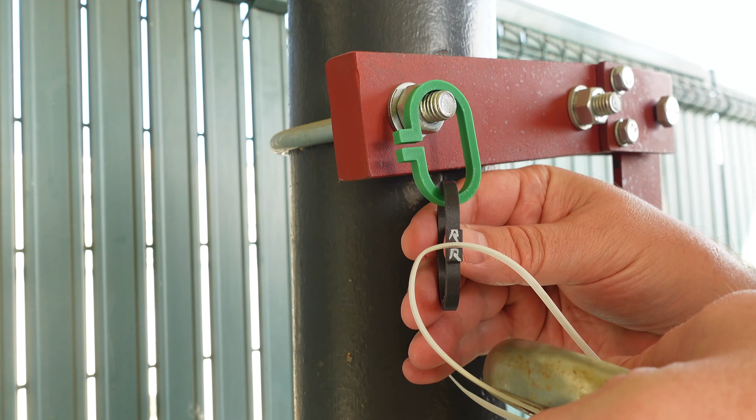This is one of the best non-reinforced ABS materials, and this is the carbon fiber version from this video, the weaker one. Even if I already did a creep test with this test object, it still has less deformation here.

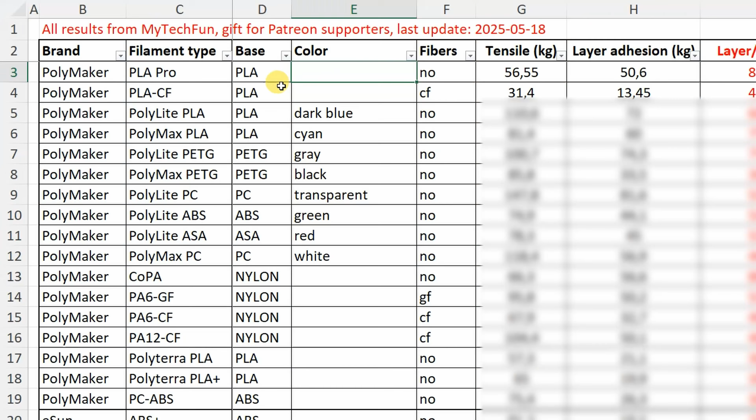I checked the summary table from Patreon supporters and I noticed that I never tested ABS filament reinforced with carbon fibers. With glass fiber, yes, but with carbon fibers, no so far. And immediately I have here two types: one is the regular carbon fiber and the other is the core version, where we have those fibers inside the filament. These two spools were sent to me by Siraya Tech for the testing and review video, but there is no additional payment, so this is not a sponsored video by Siraya Tech. This channel has its own sponsor, and that's Polymaker.

Now let's see some specifications about ABS-CF. It contains 10% chopped carbon fibers, it is heat and chemical resistant material, and it has dimensional accuracy and great rigidity. And now about the core version.

It contains 20% core concentrated carbon fibers, and with this we have all those advantages of the core filaments, like stronger layer adhesion, reduced nozzle wear, it's safer because fiber exposure is reduced, and we have a smoother surface. It is heat resistant and can be used up to 90 degrees Celsius applications.

Now the print settings. The print temperature in both cases is very similar. For the carbon fiber version, the nozzle temperature is between 250 and 270 degrees Celsius. On the core version, the maximum is 280 degrees Celsius. The bed temperature is the same, between 100 and 110 degrees Celsius. Of course, we have to use a hardened steel nozzle. The fan between 0 and 20%.

They also mention it is recommended to use an enclosure with a maximal temperature of approximately 50 degrees Celsius, which can be even passively heated by the heated bed. But in this video I decided to test this finally to see if an actively heated chamber will significantly improve the layer adhesion.

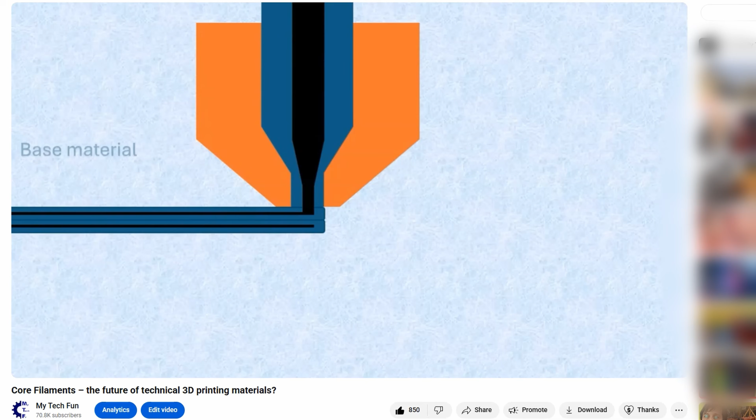If you want to know more about core filaments, I have a very short video, only 3 minutes, where I explain why the flow is laminar and why we have all these advantages. Actually, there's one exception: if you use some kind of CHT-like nozzle, in that case we don't have that advantage of reduced nozzle wear, because the part is inside the core of that filament. But even in that case, it is recommended to use hardened steel or some kind of wear-resistant nozzle.

Let's see what's in the box. Good vacuum packaging, and this material is great against moisture. I can see the bags are resealable. On the sticker, slightly different information compared to the website.

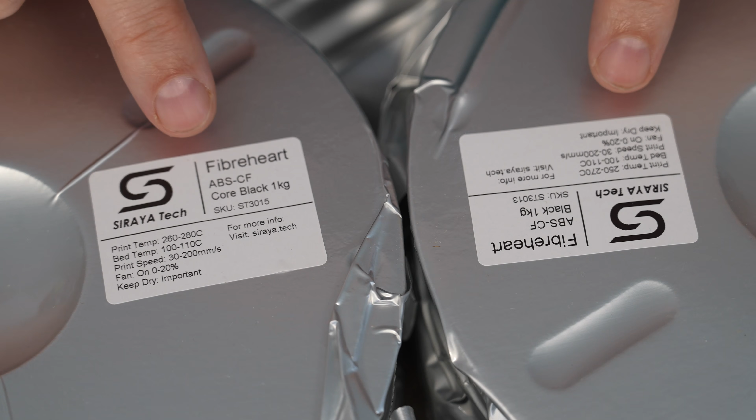Basically on the core version, a slightly bigger print temperature range, between 260 and 280 degrees Celsius. On the regular carbon fiber, between 250 and 270 degrees Celsius. In both cases, the max speed is 200 mm per second and the fan between 0 and 20%. Let's open the bags above the sealing line.

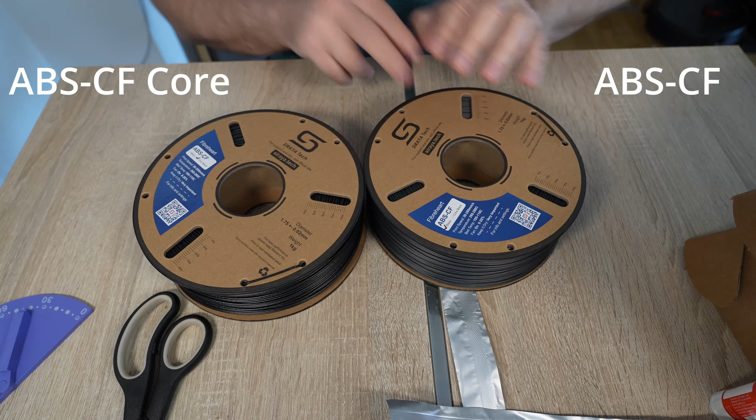So we have the core and the regular version, and on the sticker I can see the difference here. It's quite obvious that this one is shinier compared to the other, and to the touch it is smoother.

Let's see how brittle the filament itself is. This is the regular carbon fiber version. And this is the core version.

Let's measure it. Before measuring, I want to mention this: because of the smaller density, they have to place more filament on the spool to reach that 1 kilogram. But in this case, I would prefer a bigger spool, or let's say having 0.9 kilograms on the spool. This may fall down during printing.

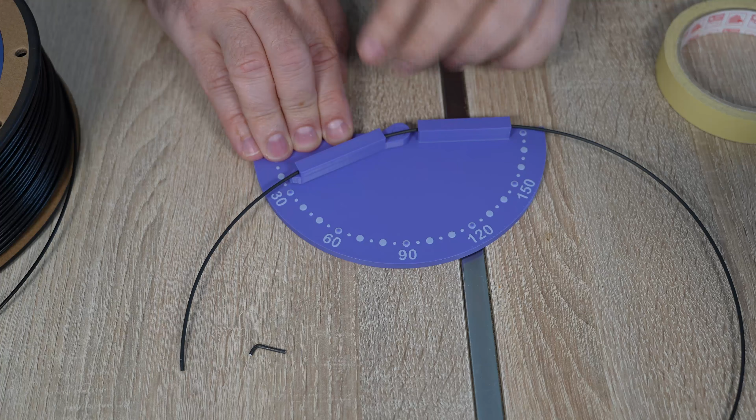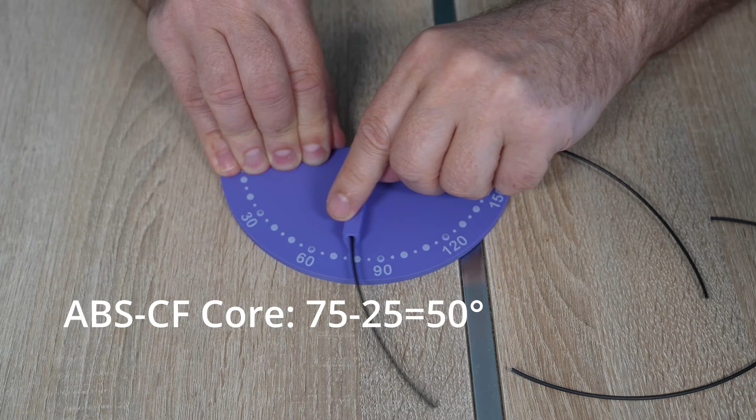Like this. This is the regular carbon fiber version, start deformation 25 degrees. I will check the footage, but I think it was 85 degrees. This is the core version, start angle 25 degrees, approximately 75. On the website they mention it is dried before packaging and we can use it out of the box. Of course, depending if you store it for a longer period, then I would suggest drying this filament.

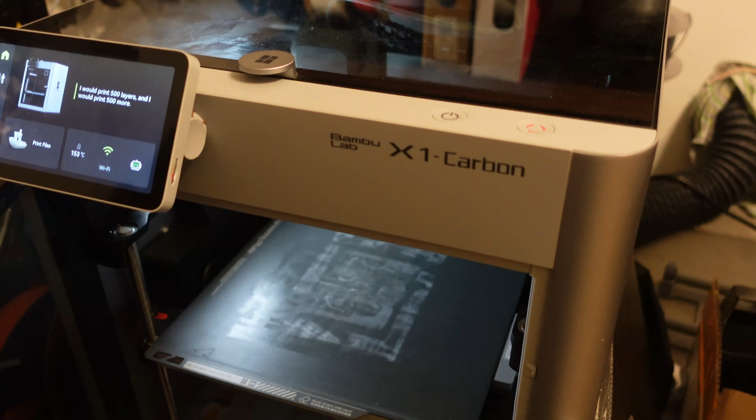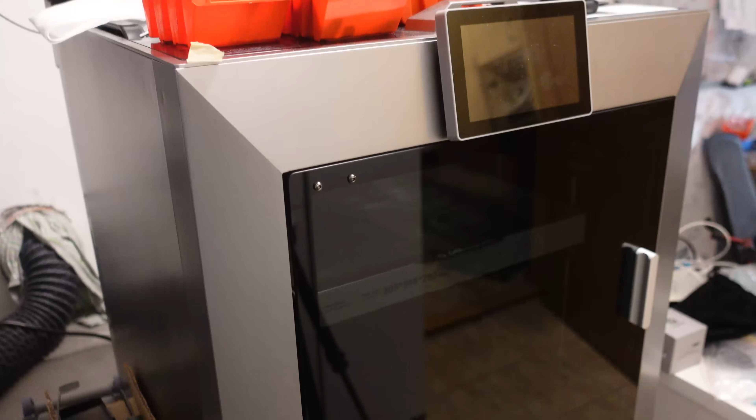Almost all test objects will be printed on the Bambu Lab X1 Carbon. I will use an engineering plate with some glue on it. My X1 Carbon is connected to that exhaust hole on the wall. Later, when I test the actively heated chamber, I will print on the Qidi Plus4. The printing I will start with ABS-CF, the regular version.

Settings in the slicer: I'm starting from the generic ABS profile. The nozzle temperature is 270 degrees Celsius, 15% is the maximal flow, and I reduced the part cooling to only 20%. Later I will test different percentages too.

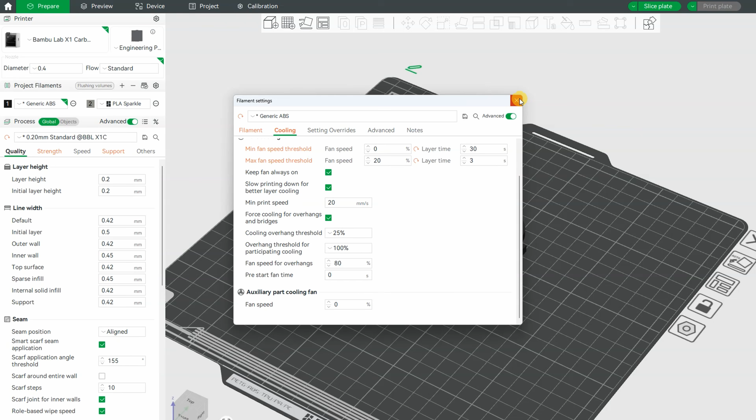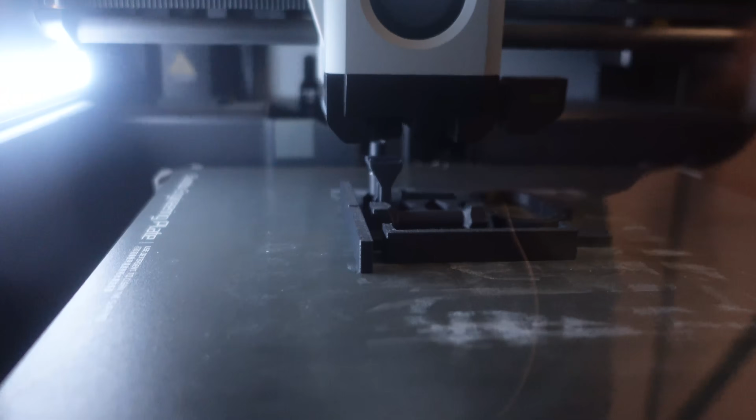These are my regular test objects. The start is good, only it is hard to see this black color inside. Maybe I should finally install some better lights. Printing will be finished soon. This is the last test object.

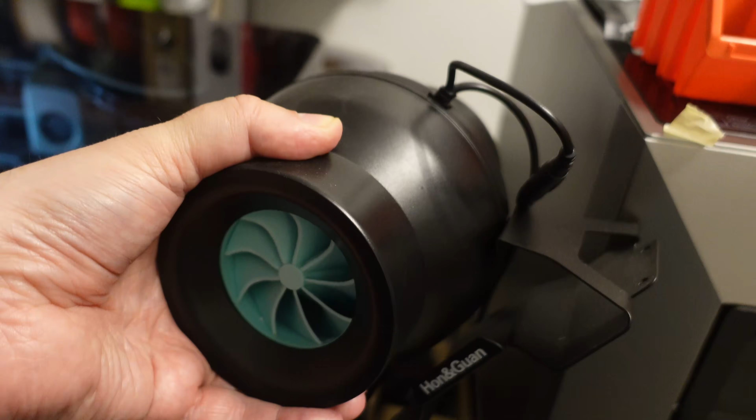Enabling the exhaust fan to suck out the air through that ventilation hole. I still haven't installed this inline fan, which will help with this because the exhaust fan is a little bit weak for this, but it is better than nothing. The printing looks great.

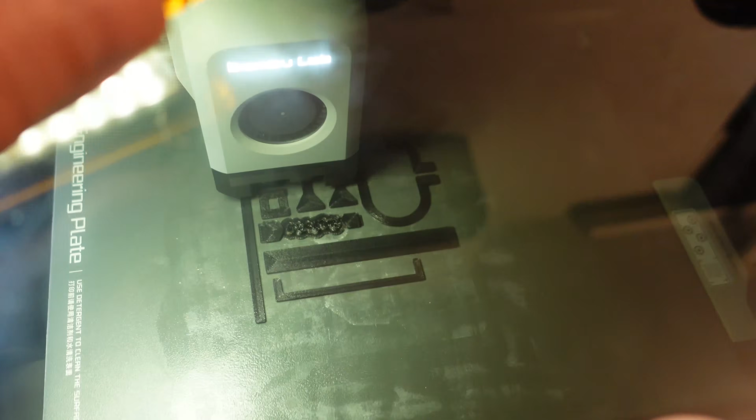Now I can see on these vertical test objects for the layer adhesion that this curling up starts to be too much. The part cooling is a little bit too low. Those 20% are not enough.

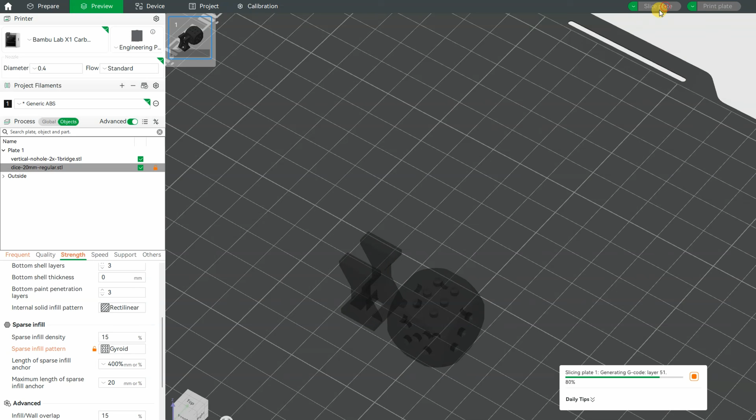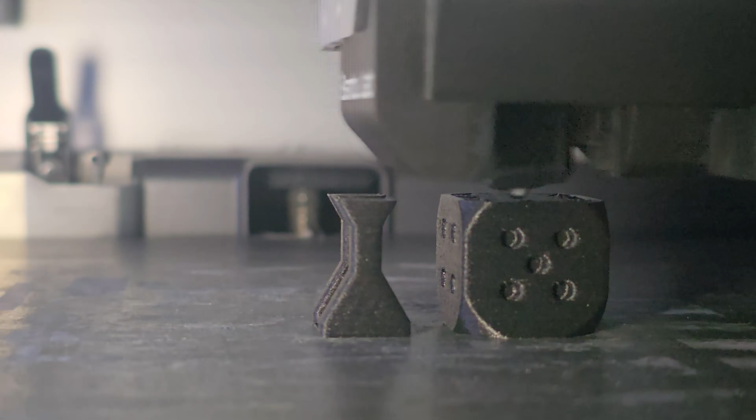And the third group with 50% part cooling.

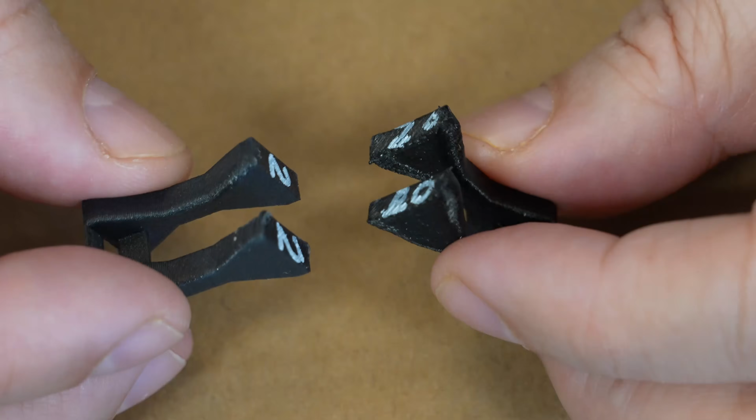Time to analyze them. This is the ABS-CF and this is the core version, 20, 50 and 80% maximal part cooling. Let's start with these printed on 20% part cooling, this is ABS-CF and this is the core version, and the regular is slightly better, but even here I don't like this overhang. This is much worse, and also I can even see here this curling up, so I would never recommend printing with these settings.

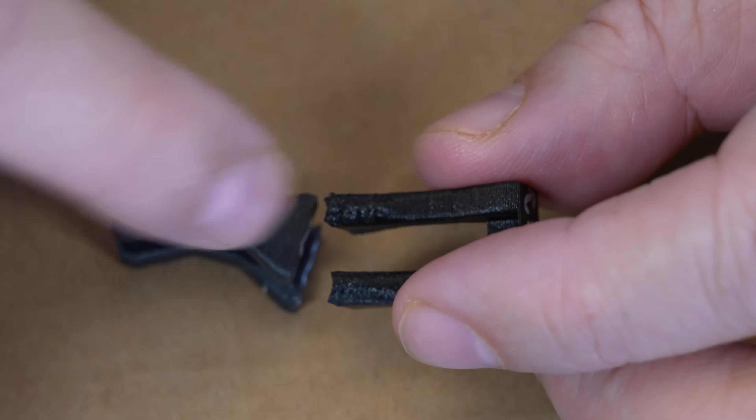Now because of that irregular shape, sometimes it even breaks on smaller load, but I will see soon. This is 80% maximal part cooling and it's completely fine. This is the default setting for the generic ABS.

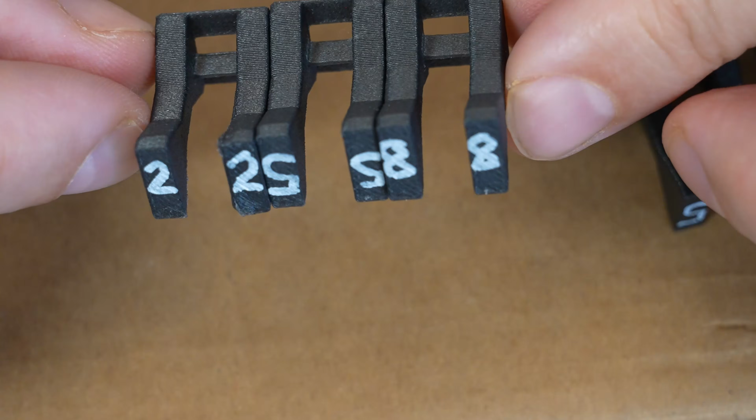But let's see what's between. This is printed with 50% and it's completely fine. This is regular ABS-CF, and this is the core version.

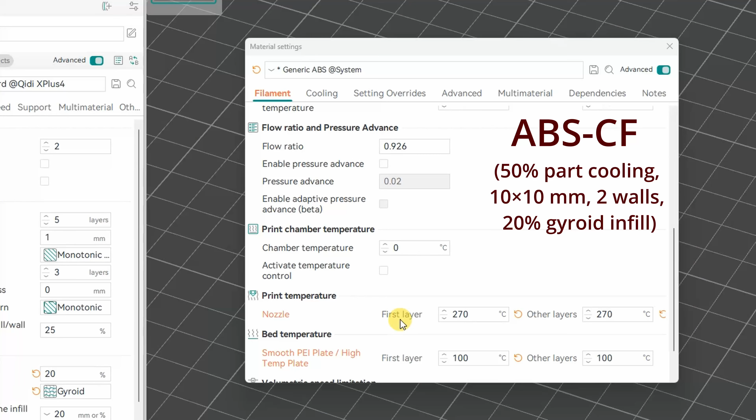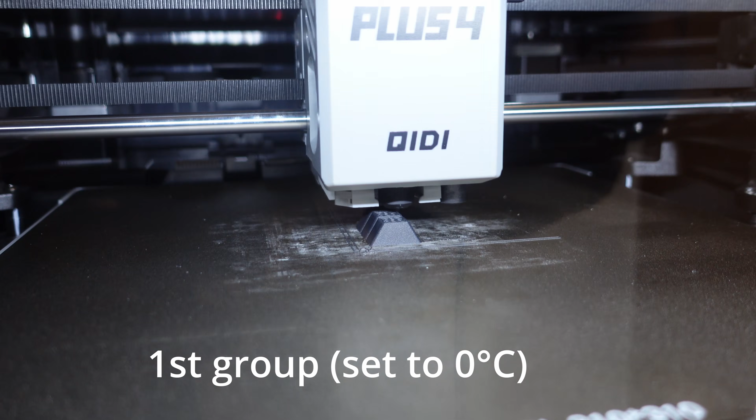Let's finally measure the effect of the actively heated chamber, so the only difference will be set temperature to 0 and 65, and I'm starting with 0 degrees. It started with the smallest cross-section area, and according to the sensor, the temperature inside is 37 degrees Celsius. Theoretically, this is the weakest point.

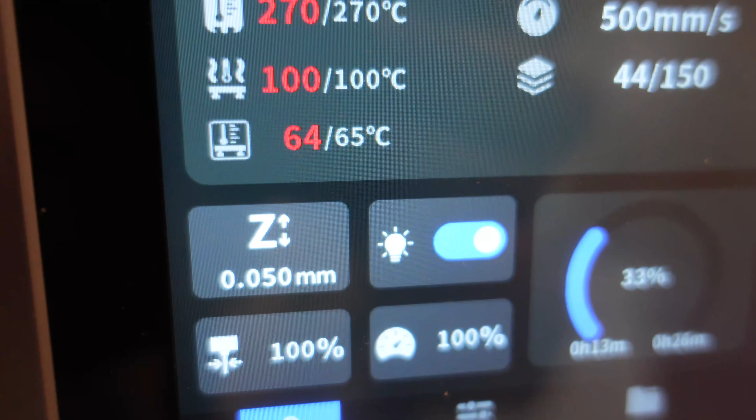The smallest cross-section area is finished, and the temperature inside is 39 degrees Celsius. It's finished and the peak temperature was 42 degrees Celsius on the chamber in approximately 32 minutes, and they look perfect. It didn't even started with the smallest cross-section area, and the chamber temperature is already 64 degrees Celsius. The quality of those overhangs is great in both cases.

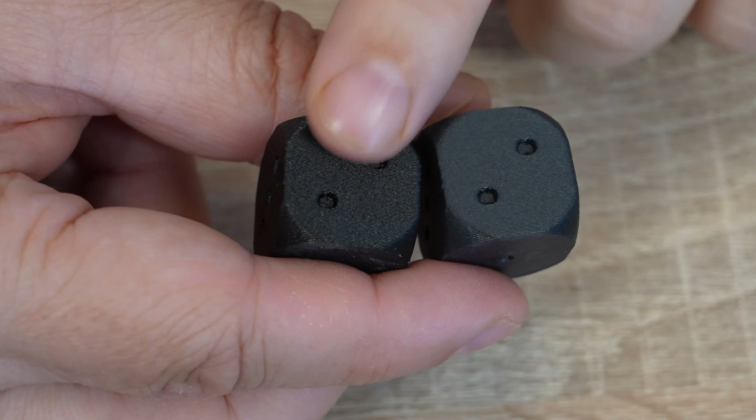I use 50% part cooling here, and we will see what's the difference in the layer adhesion. Even for the touch, the core is smoother compared to the regular carbon fiber version, but let's check the surfaces under the microscope.

Yes, somebody suggested me to do the stick tape test. Now let's check them under the microscope. This masking tape is not the best for this, but the other one which I had was transparent. I can see these kind of fiber things, but these are too big, these are not those fibers. I have to experiment more with the other type of the tapes.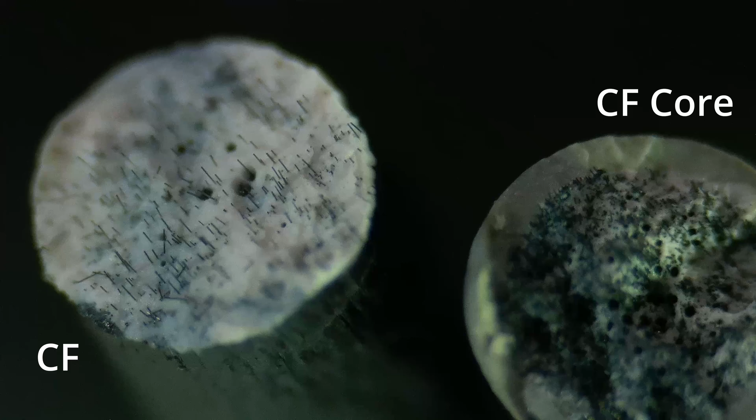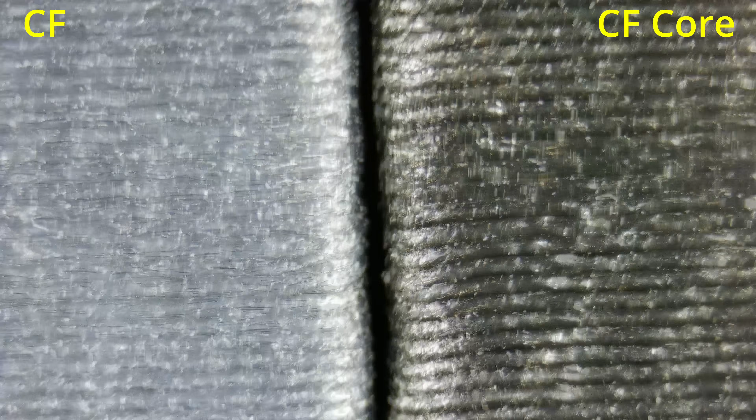But let's check the filament itself. On the left side you can see the regular carbon fiber, and on the right side we can see that core skin which doesn't have the fibers on the edge of the filament, and we can see high density of the fibers inside. This is the printed object under the microscope, and we can clearly see those fibers on the left side, but they're not exposed, they are melted into plastic. The core version on the right side is quite smooth.

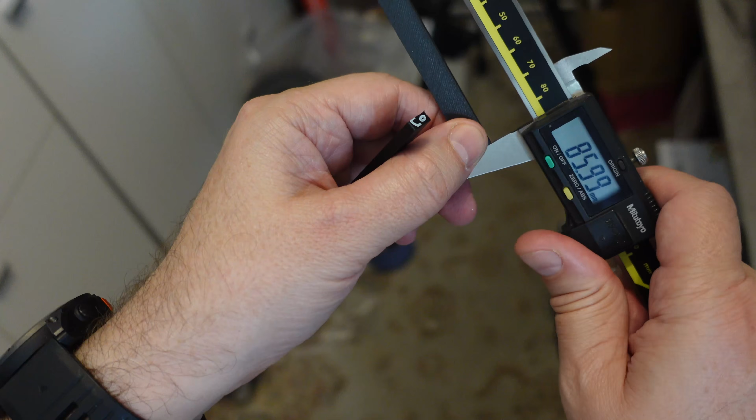Measuring the shrinking, this is ABS-CF. The design length is 80 mm. This is very close to that value. And this is the core version, and this is super accurate.

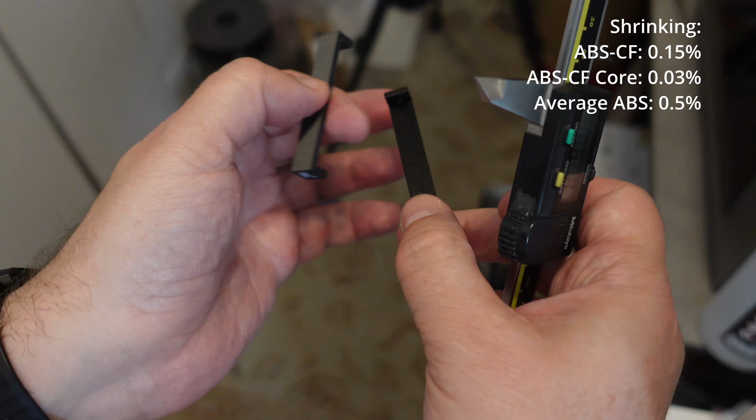I'm so surprised here that I wanted to recheck this with another test object. This is 60 mm in length. This is ABS-CF and the core version, and I already calculated the shrinking and I compared it to the average ABS. You can see the shrinking values in the corner.

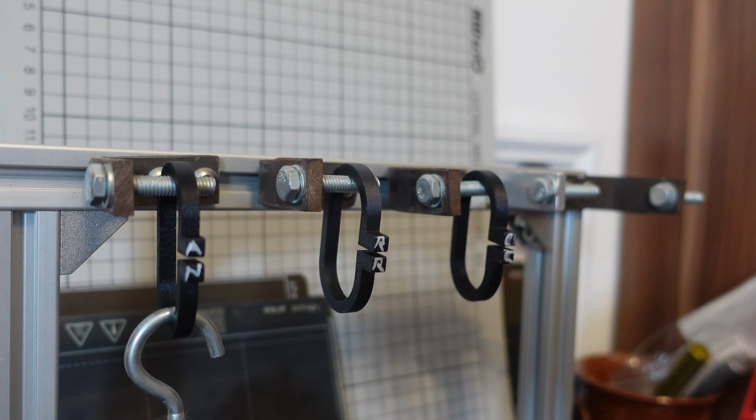Shrinking is one of the reasons why I will go sometimes with the PETG instead of ABS or ASA. Creep is the deformation under constant load, and regular ABS performed good in this test. I believe that this will be even better.

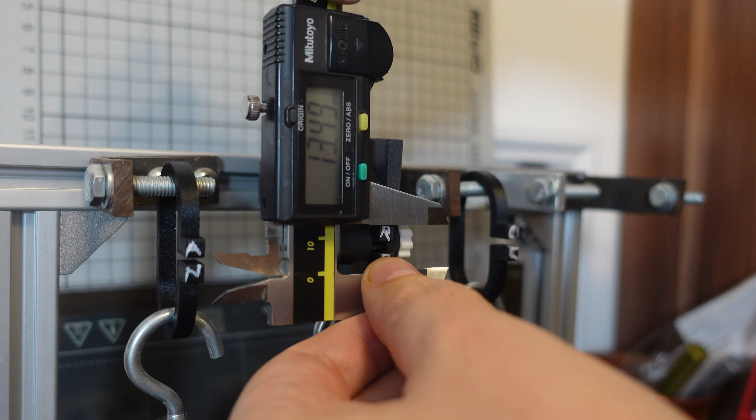Very minimal deformation and smaller on this core version. 13.49 millimeters. 12.63, smaller deformation. They will be measured every day, but let's jump in time.

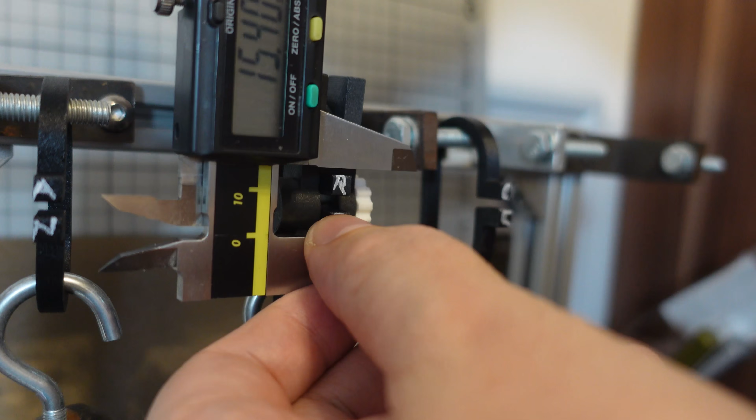Day 5, time for the last measuring. 13.77. 12.73. Let's remove the load. And the permanent deformation is almost zero in both cases.

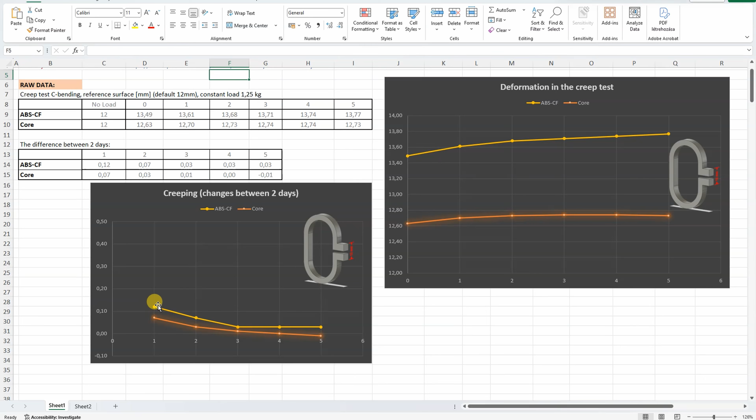On this graph we can see the distance between two reference surfaces, and we can see noticeably less deformation under the core version, but the creeping is the difference between 2 days, and that we can see on this other graph. In both cases these are extremely small values, but yes, core is better in this case.

Tensile test with horizontal printed objects. I'm starting with regular ABS-CF, and now the core version.

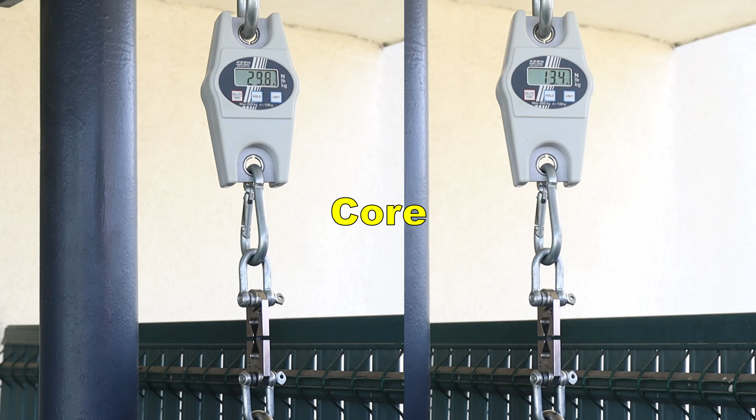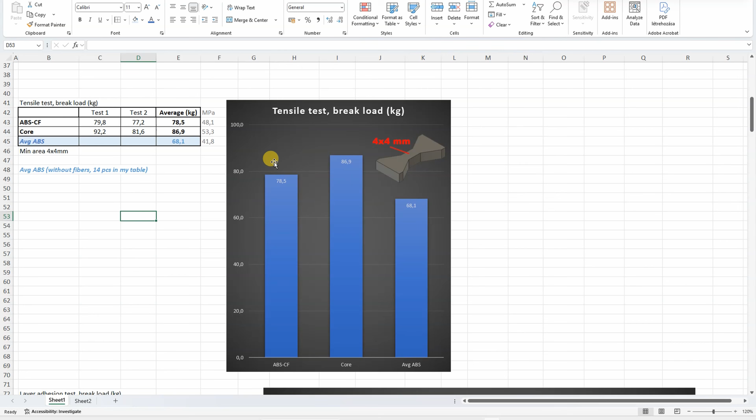I will include the data for the average ABS, calculated from 14 pieces from the Patreon summary table. We can see that the core version is stronger than the regular ABS-CF, but both are stronger compared to the average ABS.

Layer adhesion tests with vertically printed objects. This is the value for 80% part cooling, now 50% max part cooling, and this is with 20% max part cooling.

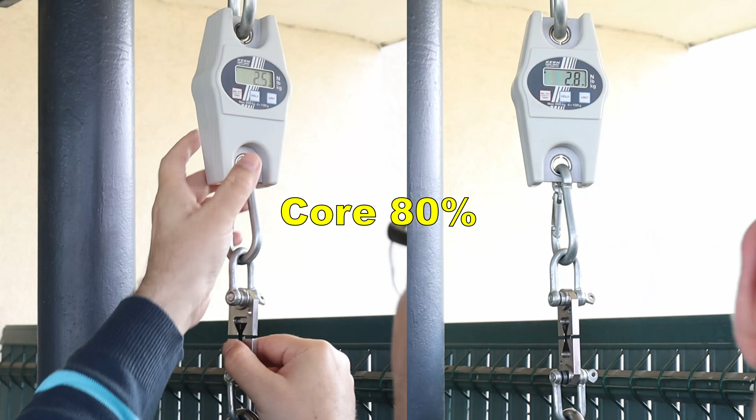Now the core version: 80% part cooling, 50%, and 20%, which had some problems with the overhangs but was still stronger. In every case, the core was slightly stronger compared to the regular ABS-CF, and we can see increasing layer adhesion with reducing part cooling.

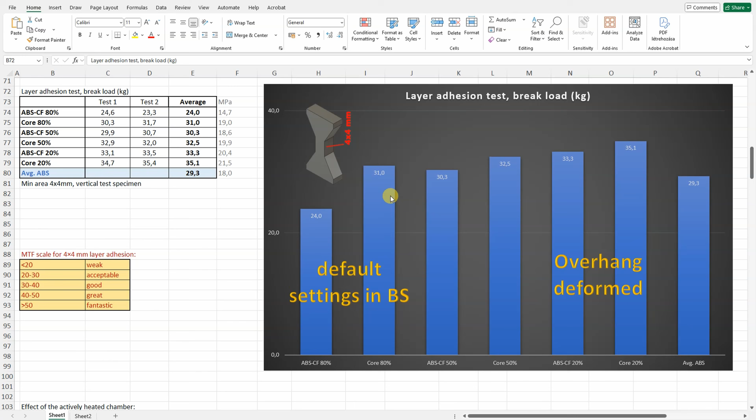This is the default settings in Bambu Studio, so probably most users will use this. These two, with 20% part cooling, had some problems with the overhang - it's a little bit deformed, so I don't recommend using these settings. Probably these two I will add to that summary table for my Patreon supporters.

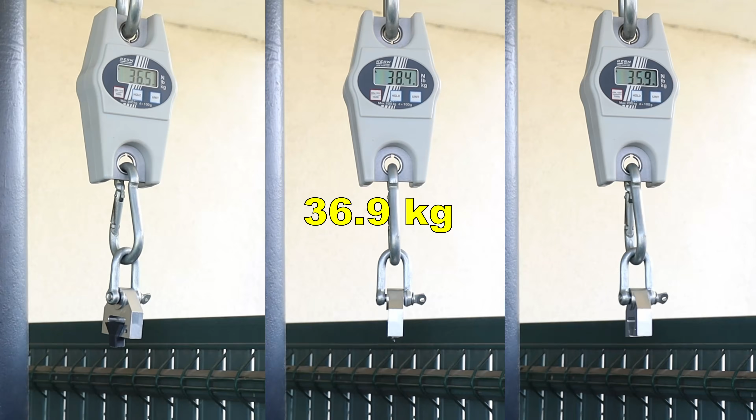Let's check the effect of the actively heated chamber, set to 0 and set to 65 degrees Celsius. The improvement was almost 20%. I thought the difference would be much smaller, and this just adds another variable into my future testings.

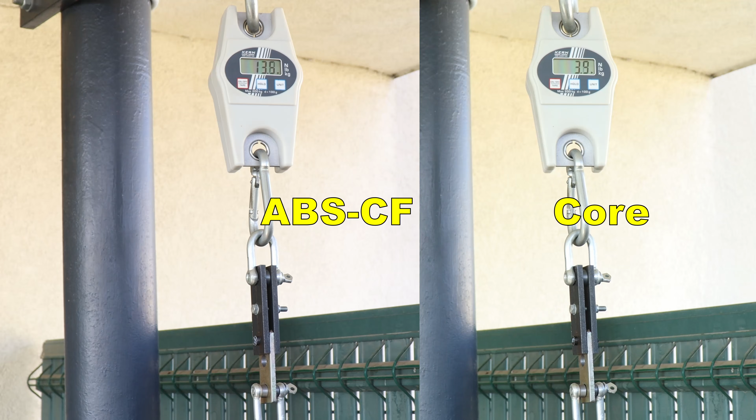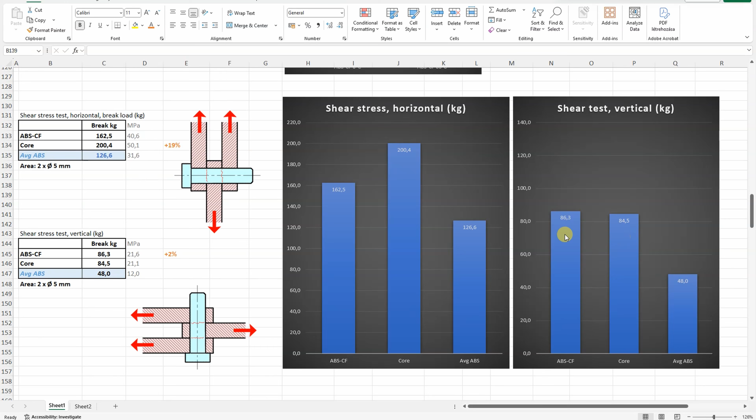These are printed in horizontal position, and these are printed vertically. In horizontal position, those carbon fibers really help, and the core was stronger. Now printed vertically, I thought the core would again be stronger, but basically the difference is very minimal, only 2%. Torsion or twist test with horizontally and vertically printed test objects.

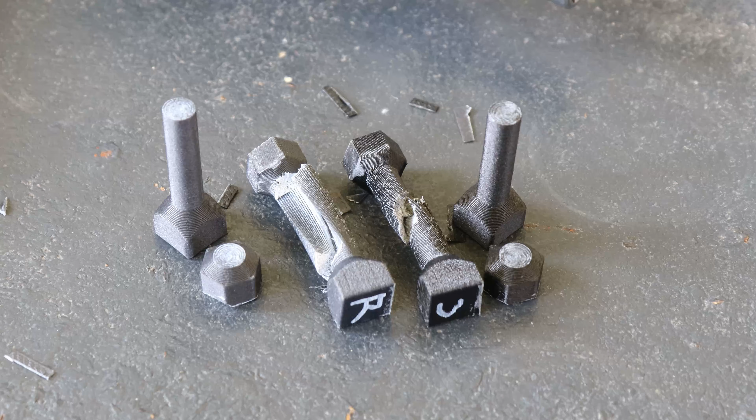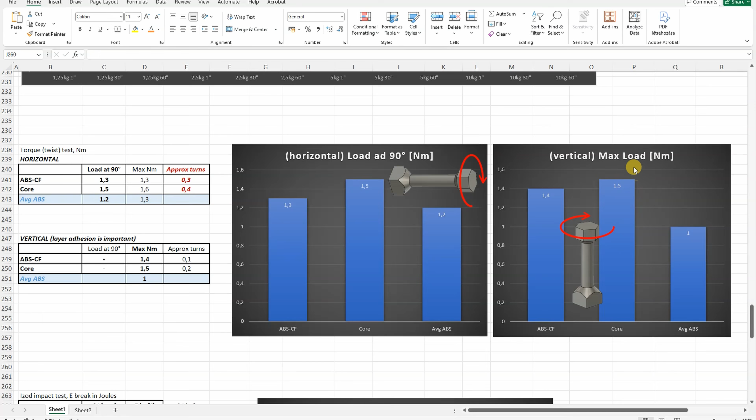1.3, 1.5, 1.3, 1.6, 1.4, 1.5. No big surprises here, but it was really nice to see that I could make almost 90-degree rotation with these vertically printed test objects from the core version. Both carbon fiber materials are stronger compared to the average ABS non-reinforced, and the core was the strongest between these two. Now, 3-point bending test.

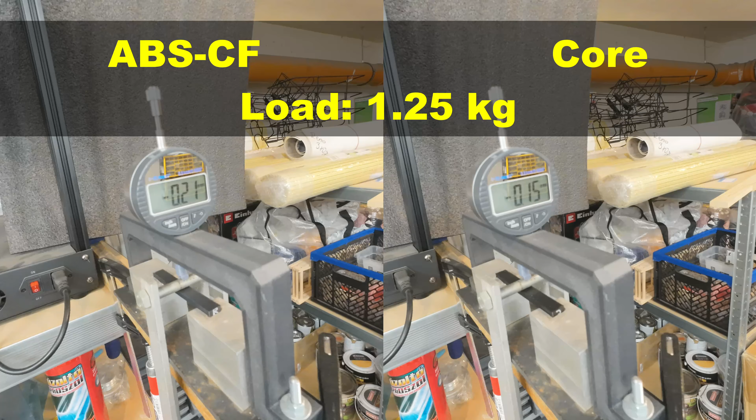Distance between supports is 50mm, and these loads will be placed one by one, and I'm measuring the deformation after 1, 30 and 60 seconds. Side by side, two materials: deformation under 1.25 kg, under 2.5 kg, under 5 kg - still no additional deformation during the time, and only under 10 kg can I see some additional deformations.

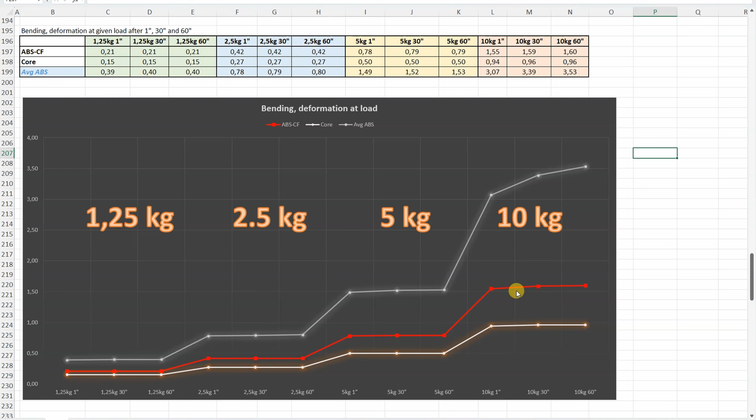Smaller values are better, less deformation, and we can see that the core is better compared to the ABS-CF, less deformation, but both are very good compared to the non-reinforced ABS. Additionally, under 10 kg you don't have that significant additional deformation during this 1 minute, unlike the average ABS.

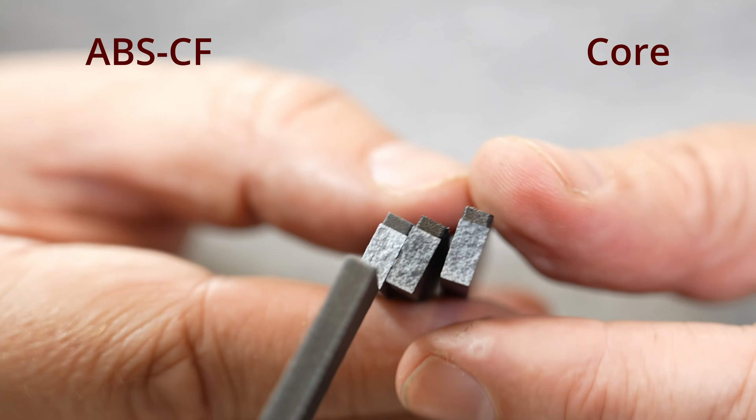Impact test, and usually ABS is a tough material. ABS CF, 0 position, core version. Not sure if it's important, but this is the regular and this is the core version. In both cases we can see this white surface, but let's analyze the footage.

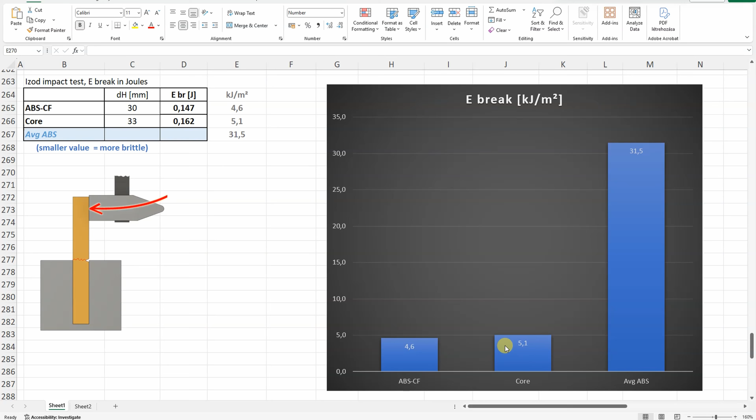This is the 0 position, and this is after breaking the ABS CF, and this is after the core version. We can see that the core is tougher compared to the regular ABS CF, but both are quite brittle compared to the average ABS.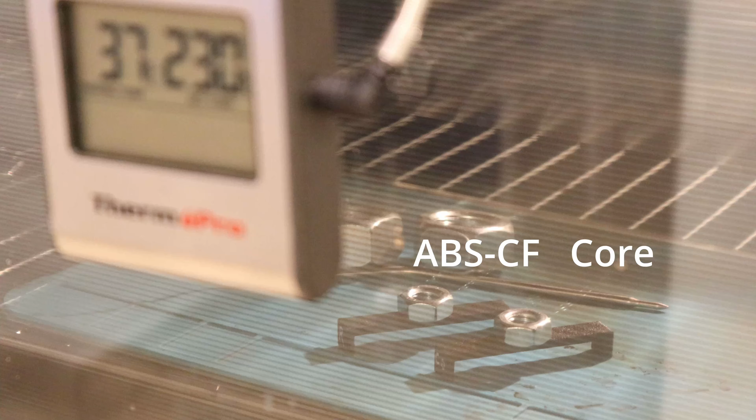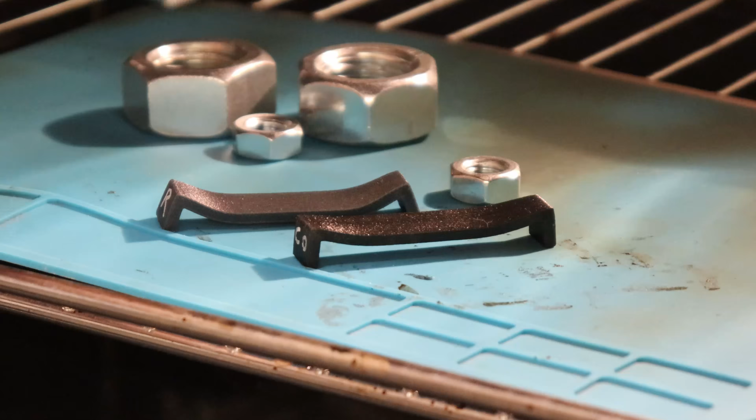Temperature test in the oven, regular and the core version. The average ABS starts to deform in this test at approximately 90-95 degrees Celsius. In this case, these temperatures were slightly higher, and the core version was better in this case. I stopped the experiment at 146 degrees Celsius, and at these temperatures both materials are quite soft and elastic.

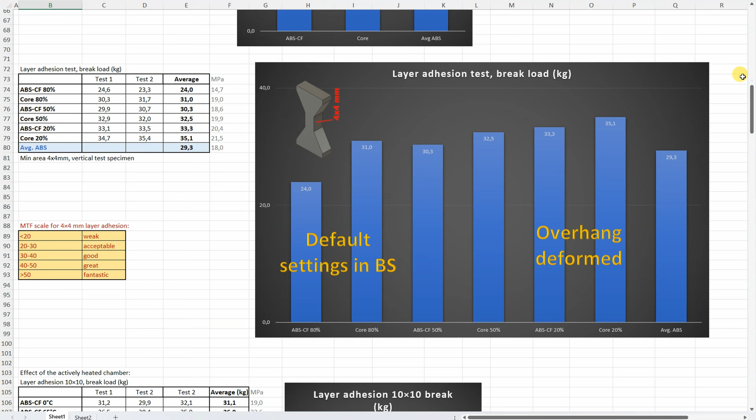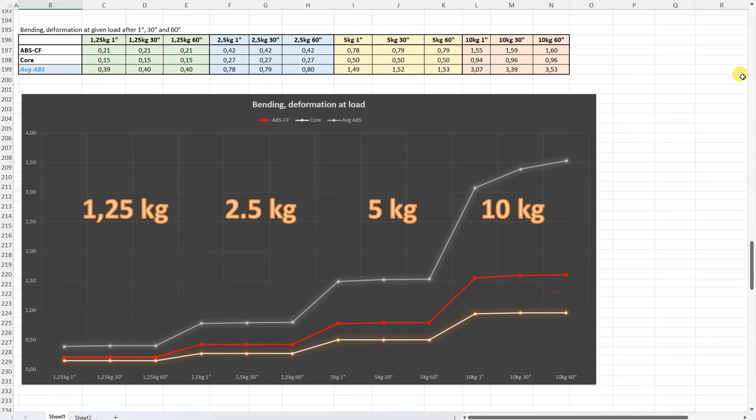And one more time, our results: this is the result of the tensile test, layer adhesion test on different part coolings, the effect of the heated chamber, shear test, bending test deformation after 30 seconds, bending test deformation after 1, 30 and 60 seconds, torque or torsion test, impact test, temperature test, and shrinking. This was quite big work, but at least I don't have to anneal these materials, unlike those in upcoming videos.

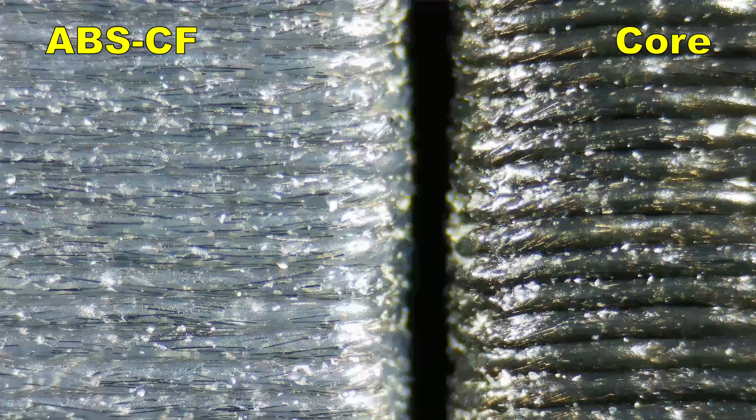Basically, if you like ABS and you're not afraid of those deadly carbon fibers, thanks to some clickbait videos, then you will like this material. Or at least we have that core version where we have a smooth surface even outside. But I checked under the microscope - even the regular ABS CF has the fibers melted into the plastic. Of course, I wouldn't use them in some part which has friction, for example this release element on my friction pendulum, but for these brackets it's completely fine.

And looks like the only disadvantage I could find compared to the regular non-reinforced ABS is that it is more brittle, resists less to impacts. Otherwise this is really great material.